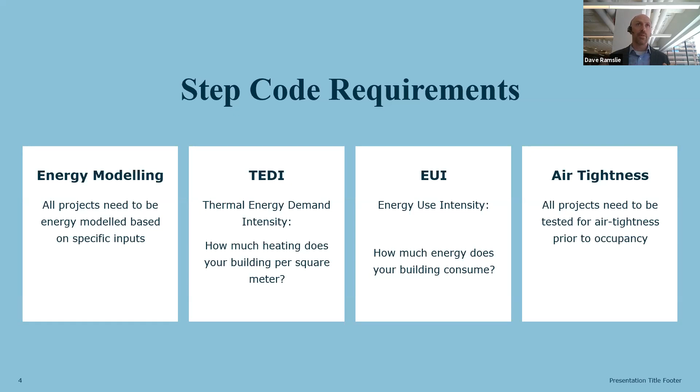So what's really unique about this is that Canada as a building industry has really been a pioneer in terms of air tightness testing, going back to the R2000 program. But the BC Energy Step Code is really the first code in North America to require air tightness testing of Part 3 buildings at a larger level. Actually, that's not true. First in Canada, the Seattle Energy Code actually does require air tightness testing.

So it's both Part 3 and Part 9. Part 3 is divided into kind of 3 different areas: wood frame residential, concrete residential, and concrete commercial. So there are no institutional requirements yet for the BC Energy Step Code. And then depending on your flavor of building, there could be anywhere from 3 steps all the way up to 5. So Part 9 residential has 5 steps, Part 3 concrete residential and wood residential have 4 steps, and Part 3 commercial has 3 steps.

There has been some guidance in terms of what's typically lower steps and upper steps. The lower steps being more of an incremental approach, like 30 to 40% better than current code, and your upper steps are getting into that 70% better, or getting into passive house territory in some cases in terms of their performance.

And what I would say typically is that whereas before you could really get out of jail on these energy efficiency requirements through a lot of your HVAC design, and it didn't really pay attention to the composition, programming, and the real architecture of your building, the BC Energy Step Code really makes you focus on those pieces, right? So one of the things you'll find in this discussion is many of us had to think about things like Shane was talking about, like unit composition and size, or the amount of glazing area on the side of the building, which is prompting new questions that we haven't had to think about before.

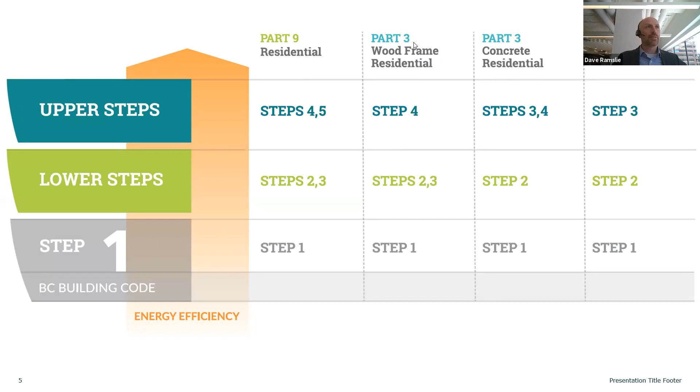So I'll leave it there, Andrew, I guess, unless there's maybe another question for you on this. No, sure, that's great.

Moving on to the next question, which I'll start off with regards to single family, and then Dave will be back to talk about high rise. And he touched on this in his introduction. The question is, how expensive is the step code? So I'll just share a presentation here with you all.

Cutting to the chase with the cost on these, the energy code investment for steps 2, 3, and 4 has been about $5,000, $8,000, and $15,000 respectively. Those are all before the Fortis rebates.

Some of the considerations, sorry? Andrew, sorry to interrupt. I think your screen share needs to be put up on the screen. Oh, it's not. I'm sorry.

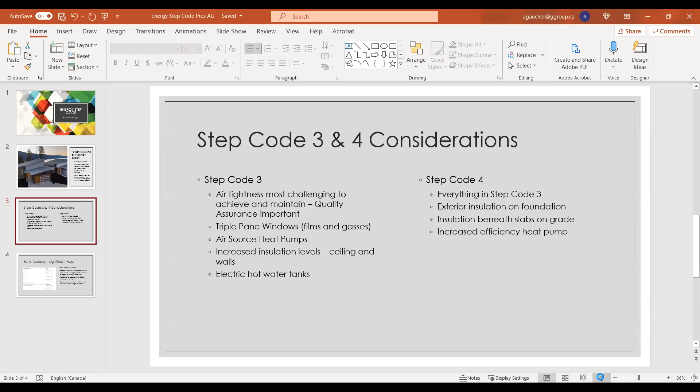It would help if you guys could see what I was talking about. Is that visible to you now, Luke? Yep, you bet. Sorry about that.

Step codes 2, 3, and 4 are achieved, and respectively with those different step code levels, the investment has been about $5,000, $8,000, and $15,000 before the Fortis rebates that are available. So a few of the considerations in building these homes that we've had to take. What I've found is air tightness is by far the most challenging to achieve. You have to get to basically less than 2 air exchanges per hour for step code 3, and then step code 4 is, I believe, below 1.5 air exchanges.

Some of the other upgrades we've implemented in those costs is triple pane windows. There are better films and gases that are available these days that you can achieve a lot of it with dual pane, which is all of our windows are traditionally dual pane. Air source heat pumps, increased insulation levels in both the ceiling and the walls, and electric hot water tanks. Step code 4, we've been installing everything mentioned for step code 3, plus exterior insulation on foundation walls, additional insulation beneath the on-grade slabs, and increased energy efficiency heat pumps.

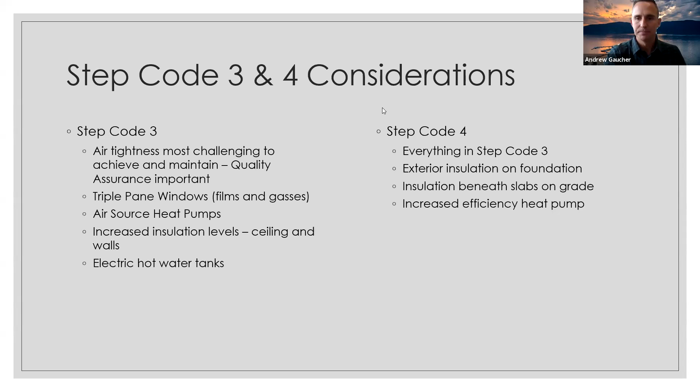I'll let Dave take over and talk a little bit about high-rise costs now. Dave? You got to be quicker on that trigger finger with my screen share and my turning my mic on.

Yeah, I gave a little bit of this away at the beginning. I described a little bit of these projects in detail already, but what I'll start to say in terms of some of the costs: in some cases, the soft costs don't need to be higher in terms of the consultants you're choosing. One of the things that we found to be really beneficial in terms of developing these projects is moving as much of the energy modeling up front as possible. Even if this is not going to be the final energy model you may use for compliance, even just doing some explorations and testing your design to make sure that you're not putting something forward that's going to be expensive to change later.

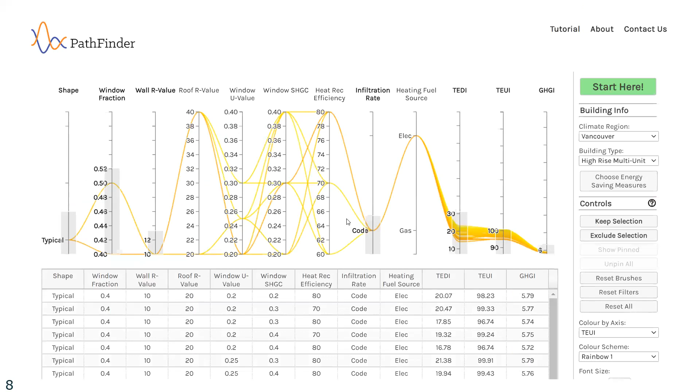Thanks, Dave. The next question is with you as well. What are some technical considerations that you can share with us for the Step Code and sustainable building in general? Yeah, I touched on it a bit, and just because I mentioned it previously, I think it's really important. Maybe I'll even just try to walk the technological tightrope here and show it in real time. This is what I was talking about with regards to parametric modeling. So this is one tool that's free here. It's called Building Pathfinder. You can find it at this URL, which is buildingpathfinder.com.

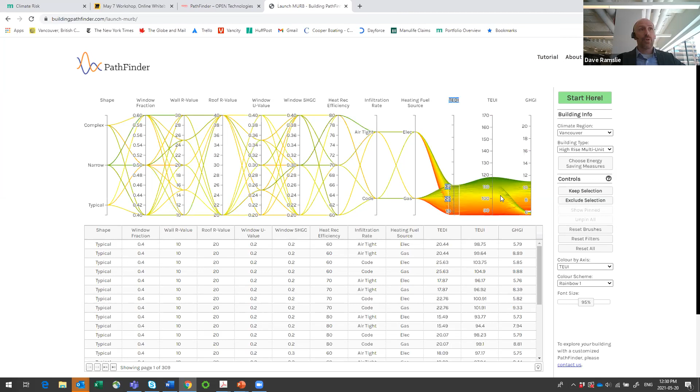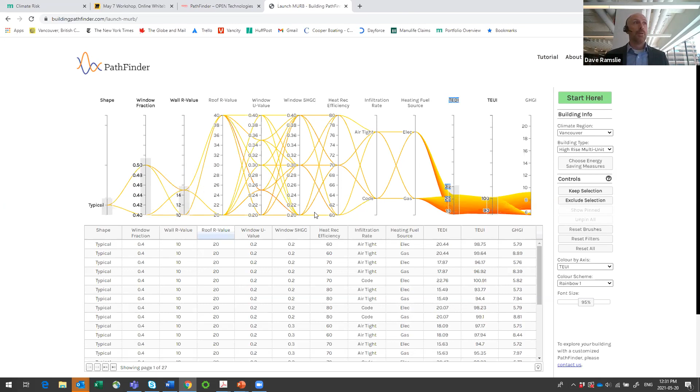One of the biggest key considerations we found, and probably no secret to any interior builder, is that getting the effective wall R values really up above the R9 range, even into like R12 territory, is really difficult, because the new calculations aren't just rated performance, but it's the effective performance of the wall. And then, looking at other things like windows. So what you can see here is, just by selecting some different options, this can start to tell you down here what are the different combinations of big design moves I need to make to start to get close to hitting these various different step code levels.

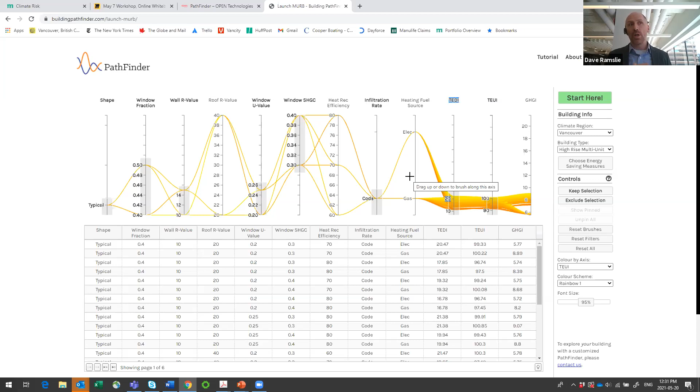So it used to be that you'd get your energy model done at the end of the process, whereby you're validating all your design assumptions and crossing your fingers, hoping that you make it. I think what we're going to really see with more step code projects is that you're going to need to do this modeling up front, so that you're not ending up in a place you don't want to be on the back end. Another key insight about building to the step code, and it's probably even just the future of where we're going here, is that decarbonization is the future. I mentioned that the BC Energy Step Code is really designed as a climate change focused policy.

But as you get into these higher performance envelopes, it does really start to make the use of heat pumps more viable. And so, getting off gas, that's going to drive your decarbonization. But all of these heat pumps are incredibly efficient, so they really are very beneficial for driving down your total energy use calculations as well. So you'll find that a 300% efficient, 400% efficient heat pump is going to be one of your biggest or most influential ways to really drop down that total EUI number in a big way.

And I know that in the climate in the Okanagan, you already see quite a few heat pumps being used in the residential context. And I'd say the new world order is going to be using some of those solutions for domestic hot water as well as for heating. So we're seeing these CO2 heat pumps from Sanden, great efficiency, and they can do the hot water as well. Ductless mini split heat pump systems are also becoming more economical and easier to install, and can in some cases be used in environments where you're getting down to -6, -7 in some years.

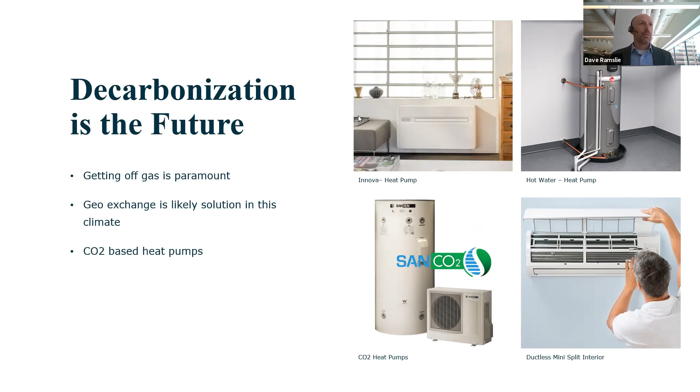And I've already talked a little bit about getting the domestic hot water onto a heat pump system. And then I think on your bigger projects, you're going to see a return to geo exchange as well, because that has a huge impact on the overall efficiency of your HVAC system. So I'll leave that there.

That's awesome. Thanks a lot, Dave. Yeah, I would definitely add on to your decarbonization point. One of the challenges we talk a lot about at our company is moving away from foams. So when we get into step code 5 and beyond, call it in 5 to 10 years, one of the challenges we have to start thinking about is moving away from foams. They're high carbon footprint, but they're used extensively for insulating purposes right now. So one more thing to think about.

Chris or Shane, next question for you, Shane. Can you share some of the design considerations of the step code and energy efficient construction design that you've implemented here in Kelowna?

Hear me okay? I got the tech right too?

Lovely. I think the biggest change that we're going to see, at least in the short term until technology catches up with some of the building methods, is a real change in the shape of our buildings. So we're going to end up with simplified massing. We're going to have to look a lot harder at orientation. One of the things you see in our typical good architectural design is a lot of ins, outs, ups, downs, cantilevers, all sorts of variations in a building's facade. And all of that hurts dramatically when you're trying to prioritize the envelope, which is really the difference between this code and step code now compared to what we've had in the past.